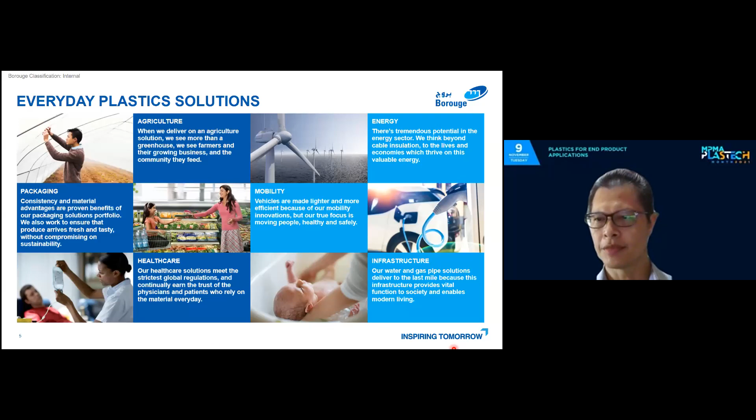For infrastructure, our business is divided into 3 subsections. Utilities, this is focusing on pressure, water, and gas. Construction, focusing on plumbing, indoor applications, and also soil and wastewater discharge, and water harvesting facilities, as well as geomembrane for landfill and mining applications.

For industrial, typically it's more of a large diameter relating to a refinery or oil and gas, with this large diameter for seawater intake and outfall. And these two are steel pipe coated with polyethylene for transportation of oil and gas medium.

BorSafe is a family of pipe material that we have. This is for pressure application. We have black as well as colored, and it ranges from medium density to high density. So today we focus on this PE100 thick wall application. This grade is designed for industrial, mining, and nuclear applications that require thick wall, large diameter pipe.

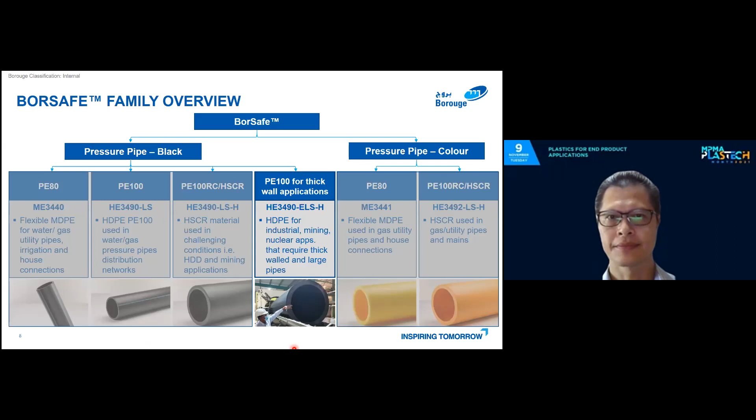What is large diameter? We are looking at more than 1200 mm or thickness SDR 7 or SDR 9. This could amount to more than 95 mm. So it could be PN 25 or more, or sorry, PN 25 and less.

This is mostly for industrial, because we are using it for water treatment and supply for mining, water transmission pipelines, and seawater intake and outfall for thermal plants and desalination plants as well as nuclear plants. Because this pipeline is launched into the sea, flexibility is required during service.

And all these projects are project-based because you don't build refineries every day. So these are determined by large project requirements, and this demand is also determined by local production capability. If it is possible to make locally, it will be much lower cost compared to shipping from another country. Maximum wall thickness of PE pipe that can be produced depends on combined factors such as machine, production capability, material property, as well as skill of the operators.

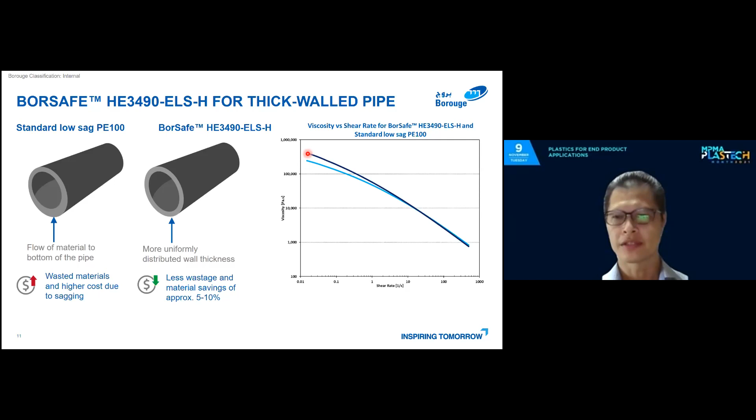So much for the introduction of this material. Look at this comparison of properties. RCP, this is the rapid crack propagation. This is a property of the pipe when subject to high impact. This pipe will crack, so this material needs to withstand the crack propagation and arrest it before it progresses to further length. It has the same performance as the standard PE100.

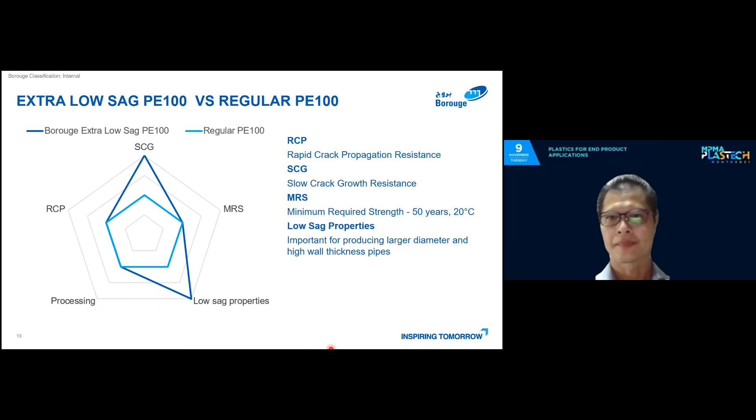Here is just a schematic of grade recommendations for the sizes that are required. If we need a 60 to 70 mm wall thickness of the pipe, our standard PE100 3490 LS would be suitable. If you have anything more than 70 to 90, then I would recommend the LSH material. Of course, if you have anything more than 95 mm, the best in class would be ELSH.

This grade is made with bimodal technology with hexene comonomer. The ease of processability, in addition to the resistance to sagging, is through this improved viscosity MFR that we have seen. There is a more than 0.15 provision given in ISO 4427. Again, I must stress that the wall thickness capability changes per local production capability. That means if your local machines are able to make this size, with the raw material used, coupled with operator skill, a good large diameter thick wall pipe can be achieved.

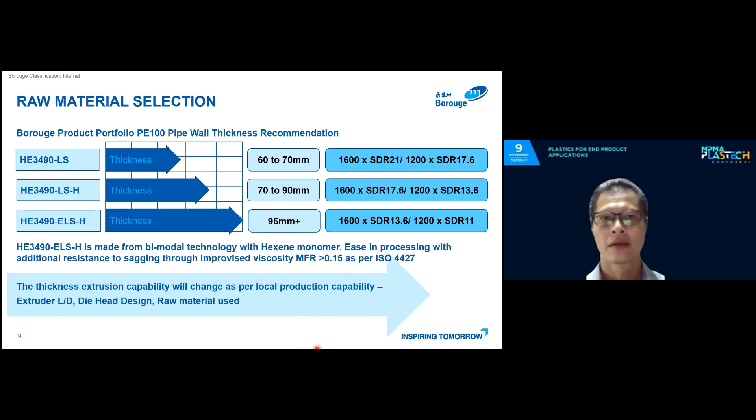Next is in Myanmar, in a copper mine. This pipe application is for acid solvent transmission. As we know, in mining you need a lot of acid to wash away the material to get whatever you want from the mine. The pipe is produced by Chinaust, size 800 mm SDR 11, so about 74 mm. What they require is corrosion resistance against acid solvent, and PE100 is good for this kind of chemical resistance.

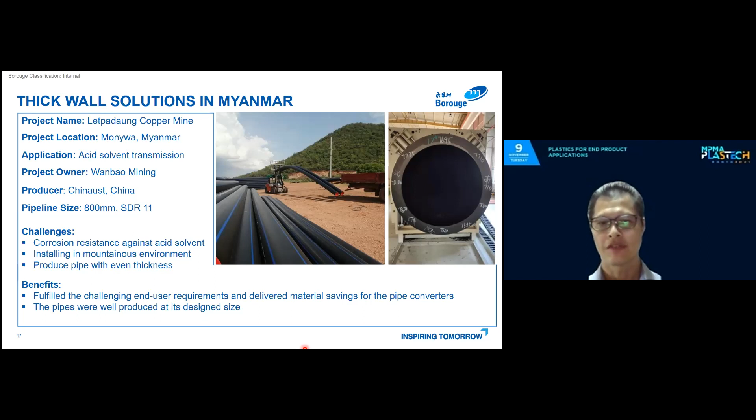The last example is in Vietnam. The producer is Thiên Phong Plastic. This is a province southeast of Ho Chi Minh City. The purpose is seawater transportation into prawn farms. The pipe sizes were 1200 to 1600 mm, SDR 11 to 17, so wall thickness ranges from about 94 to maybe 109.

What they need, of course, is a suitable PE100 material that can be made into even wall thickness, as well as resistance to seawater corrosion. And they need a large seawater volume transported through harsh conditions at the installation site, because the pipe has to go through sand dunes, under the river, and then to the prawn farm. So this ELSH, a durable pipeline with minimum maintenance cost, is able to support their prawn farm operation.

So much for all the examples as well as the material introduction. Here I conclude: development of this material and pipe extrusion technology have driven production of even larger pipes, currently up to 3.5 meters. The success of these large diameter pipes has been proven in industrial application, as you've seen above. Provided operational pressures are not too high, PE100 can be cost effective for large diameter water transmission pipe when whole life costings are taken into consideration, including pipe maintenance and leak management.

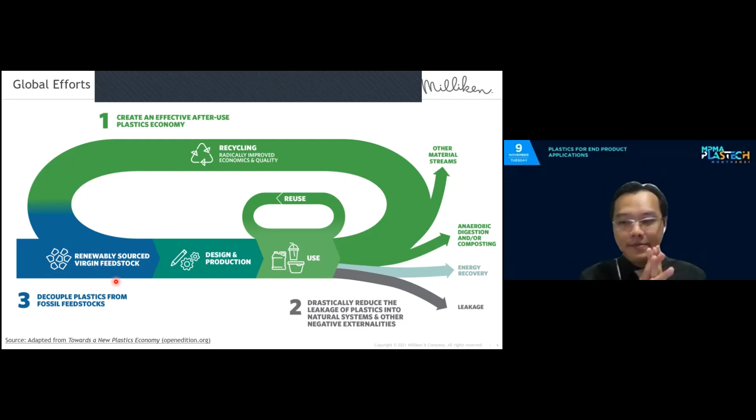How can we use renewably sourced biomaterial? These are the three main themes. But the theme of my talk today is really the often overlooked.

What about the design and especially the production stage? My talk will be about injection molding, optimizing the process to use as little energy as possible to be as sustainable as possible. Sure, all of this needs to happen, but let's not forget small parts of the big cycle where we can also make an impact to increase the sustainability benefits.

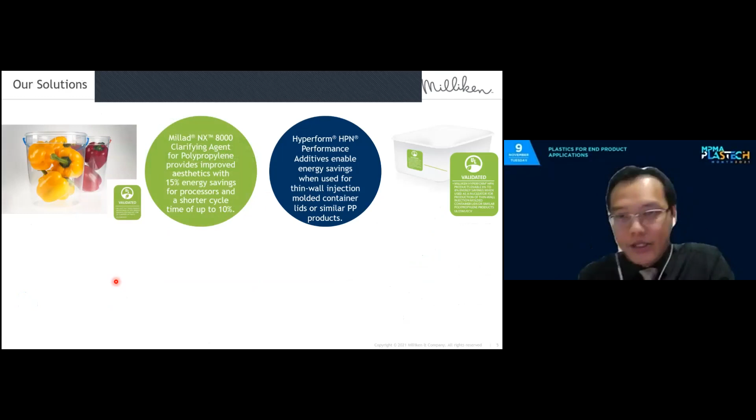So today we will be talking about three additive solutions from Milliken. Very quickly, our clarifying agent, Millad NX8000, our high-performance nucleating agent, HPN, and also the very new Delta Max impact modifiers. Let's look into them one by one.

NX8000 is right now the most popular, most advanced clarifying agent for polypropylene, with a lot of aesthetic improvement. But today we are really talking about how it can enable the optimization for injection molders to save energy and reduce cycle time. So I have a 3-minute video, please enjoy.

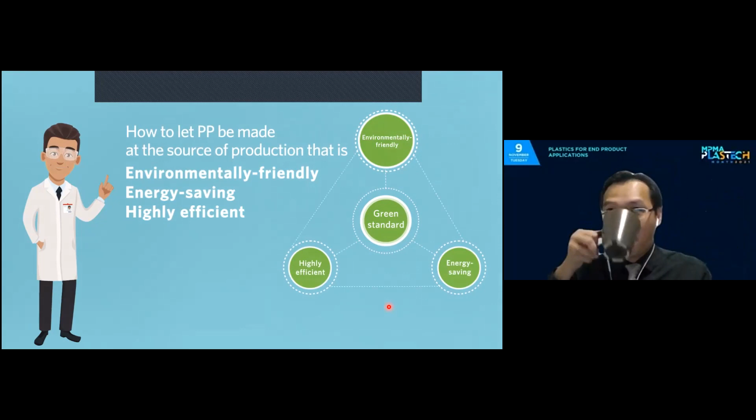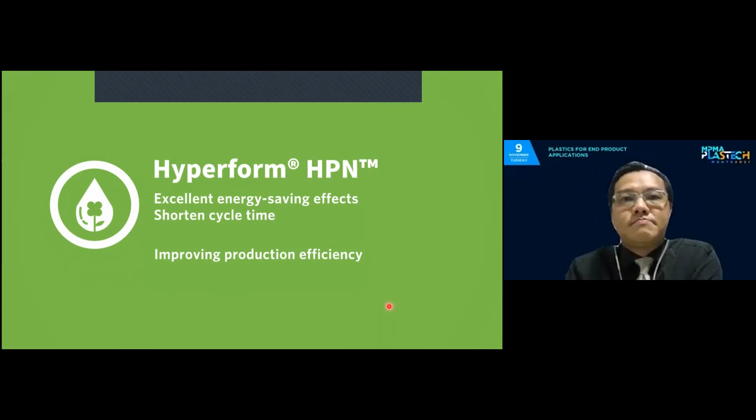Do you know how to let PP be made at the source of production in a way that is environmentally friendly, energy saving, and highly efficient? Compared with traditional polypropylene clarifying agents, having Millad NX8000 clarifying agent in the injection molding process can effectively shorten the molding cycle, reduce injection temperature and energy consumption by up to 15%. High-performance HPN not only has excellent energy-saving effects but can even shorten the cycle time, improving production efficiency. Thanks to efficient and energy-saving injection molding processing technology, Milliken products have been independently certified by UL and conferred the UL Environmental Declaration Verification. Being one of the most trusted third-party product safety and standard development institutions in the world, the market fully trusts UL-issued sustainability declaration verification. If we produce 1,000 tons of Millad NX8000 PP injection molding products to replace ordinary plastic products, it is equivalent to saving 3,672 hours of production time, which is approximately $150,000 worth of expenses, a reduction of 4.1 cars' annual fuel consumption, decreasing carbon dioxide emission by 11.8%, which protects 18,210 square meters of forest area, equivalent to 2.5 times the size of a standard football field. Similarly, if you use high-performance HPN to produce thin-walled products, you can reduce energy consumption by around 5 to 8% on average. When a single material is used for takeout packaging, it will be more convenient for unified recycling and reusing. If you need more information about UL, please contact a Milliken representative near you. Come and join us, and together we will protect the world and the environment. chemical.milliken.com

I hope the video was clear enough, but let me quickly go through the technical fundamentals on how NX8000, the clarifier for polypropylene, enables this productivity increase.

Traditional clarifiers, before NX8000 was introduced to the market maybe 10 to 12 years ago, had a dependency of haze, which is the optical performance, the transparency, versus the processing temperature or injection melt temperature. Traditional clarifiers have the drawback that they need high temperature to work properly and deliver optical performance. If you try to reduce the processing temperature or the heating to your extruder, the parts will turn less and less transparent, and it does not meet requirements, because the requirement of a clarified random copolymer is optical performance.

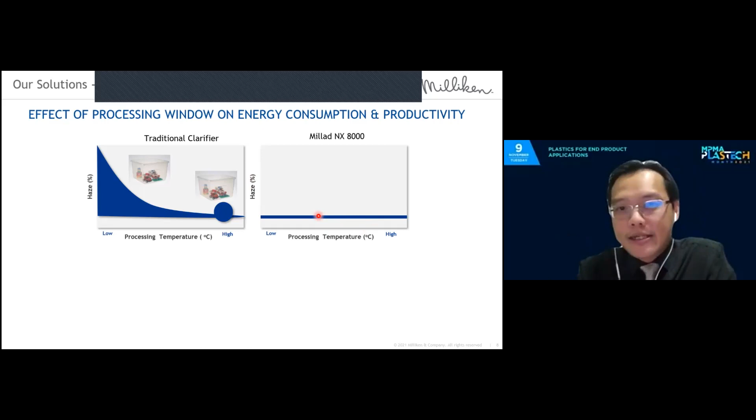But since we introduced Millad NX8000, it is insensitive. The haze, the optical performance, is not sensitive to processing temperature. Therefore, whether you process it at a high temperature or a low temperature, it works fully, it functions properly, there is no degradation or negative performance.

So we can translate that. Traditionally, the industry used to have to process clarified random copolymer injection molding at high temperatures. And naturally, if you are molding with high melt temperature, you would also need high cycle time. The hotter your melt, the more time you need to cool down in your mold before you can eject properly.

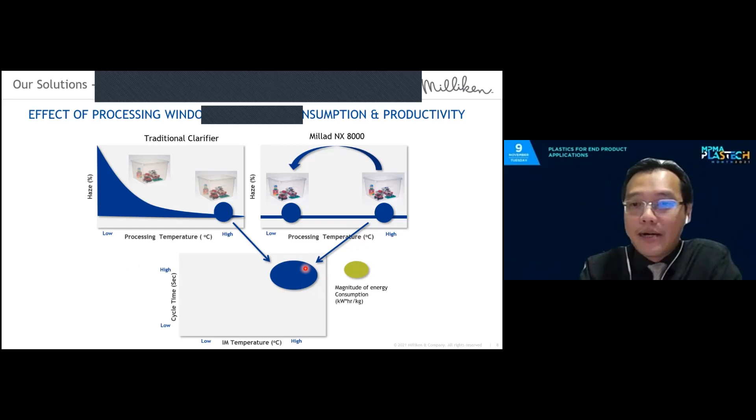We try to symbolize the size of the circle, the size of the bubble, as a magnitude of energy consumption used. By reducing the temperature, because now we don't have the bottleneck of needing high temperatures for the clarifying agent to work properly, most of the time we can also reduce the cycle time, because you are injecting a cooler melt and now need less cooling in the mold before you can eject properly. Therefore, you can reduce both the energy needed for heating your extruder, as well as improve productivity - lower cycle time, up to 10 to 15% productivity increase, meaning the energy needed to produce 1 kg, 1 part, or 1 ton normalized will be even smaller. So productivity increase, faster outputs, more parts per machine, but also energy savings per part.

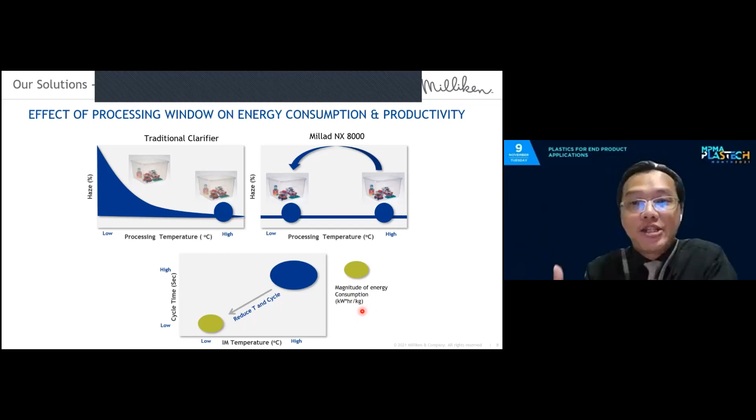Not just the overall haze or transparency benefit you get from Millad NX8000, you also get less defects and no voids. Because if you try to use the traditional clarifier random copolymer PP, especially if you try to reduce the injection temperature, it gets hazier, less transparent, and there's usually a higher risk and probability of defects such as white streaks and white specks.

And especially voids in certain parts of the plastic. Voids aren't air bubbles trapped, but they look like that. Especially now, in a very close-to-home application of syringes in this COVID world, vaccination, voids in a syringe body are a big no-no. You need to let the nurses and doctors have full confidence that they're injecting properly. You do not want them to mix up defects in the syringe barrel with actual air bubbles trapped in the medicine they're injecting.

So really, not just energy savings, but a trouble-free, robust processing window with less defects when using NX8000.

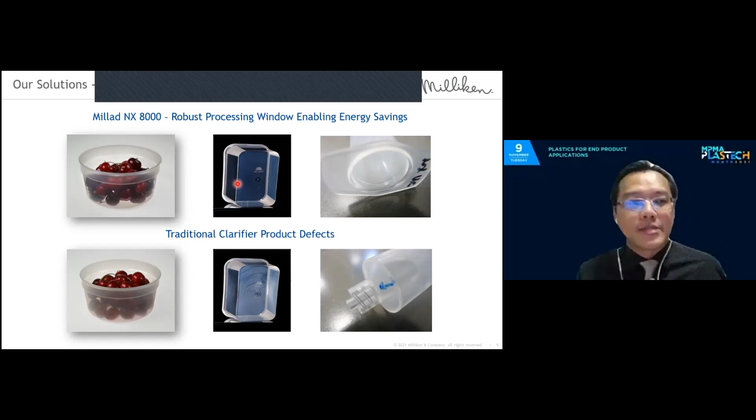On average, as verified and accredited by Underwriters Laboratory through ECV environmental validation, we are seeing a 10% energy savings reduction based on the concepts in the previous slide. And of course, you can equate that to roughly 10% reduced CO2, because if you use less electricity, power plants need to generate less.

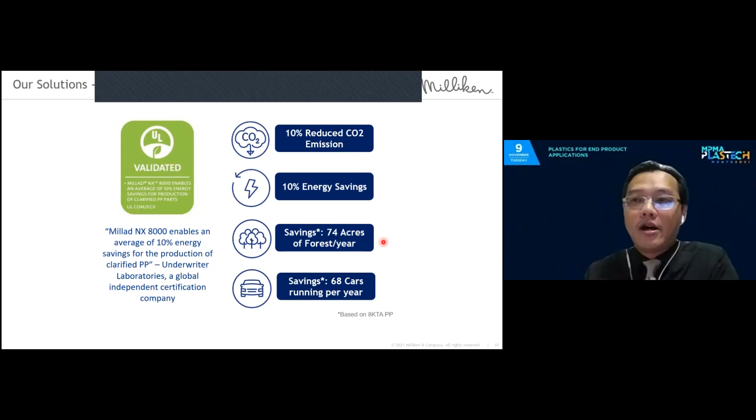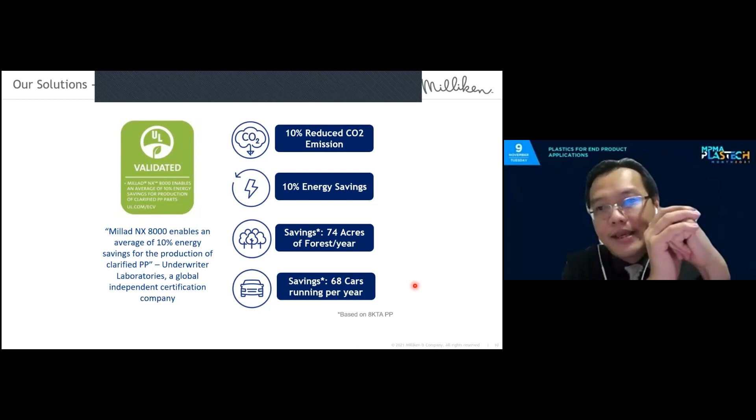If we convert that CO2 equivalent, for example using 8,000 tons of polypropylene produced per year, the 10% CO2 reduction is equivalent to 74 acres of carbon capture by forests, or about 68 cars per year worth of carbon dioxide emissions. So even by optimizing, if each injection mold can use 10% less energy while still producing the same number of parts, that's a net win for sustainability globally.

There have been a lot of trials over the past years across various different parts, as long as they contain NX8000, especially for random copolymer - things like pumps, closures, containers, or thin wall applications, across various regions and various types of machines.

On average, there's a 10% reduction in cycle time, and 7 to 25% in energy savings, electricity savings, and thus CO2 emissions. You can put a green label, validated by UL, on the parts and brochures to educate the rest of the consumers and the industry.

But don't forget, if you calculate the dollars and cents - your energy costs, overhead, labor costs, depreciation - put it all in, a 10% reduction in cycle time with the productivity it brings can sometimes bring up to an average of $100 per metric ton processed in dollar savings.

And this is pure processing optimization - it's not about getting a cheaper material. With NX8000 clarified RCP, optimizing the processing conditions alone gives you the dollar savings as well.

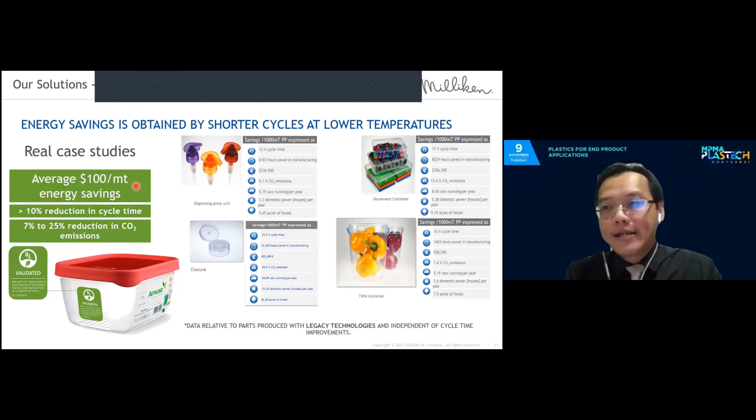This time it's mainly about the core effect of the nucleating agent - HPN, Hyperform nucleating agent. What this means is that when injected into the mold, it enables more efficient nucleation and crystallization of the PP, so it solidifies and sets quicker and faster in the mold compared to polypropylene without HPN. All the data suggests on average 5 to 8% savings.

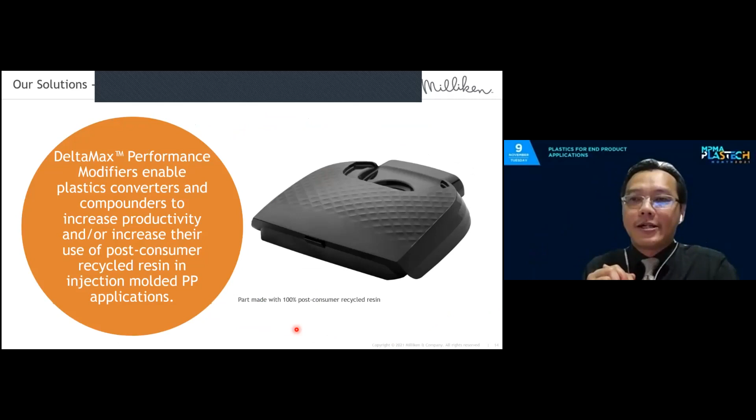Moving on. So Deltamax is a very new to the world technology, which part of it also helps in terms of optimizing the processing condition of an injection molding process. But to take a step back, we are focusing here on impact copolymer polypropylene or block polymer polypropylene, right?

For injection molding, it is always a case where the higher the MFR, the easier is your injection molding, wider window, especially if your parts are large or your flow paths are very long. But there is always that balance or the tension, right? If you have very high flow ICPs, most of the time you cannot have higher impact ICPs. And if you need high impact performance, you are usually limited to the melt flow that you can have.

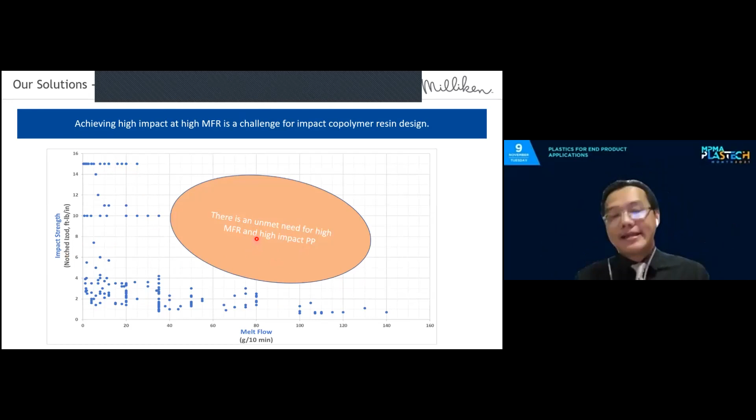And this is where Deltamax comes into play to target the space where can we have both high MFR and higher impact strength. To be honest, even right now, you can meet this with the solutions which are already available, for example, impact modifiers. But Deltamax is not just another impact modifier. It will manage your melt flow and impact strength at the same time without significant reduction of stiffness, which is the usual negative effect of putting too much impact modifier.

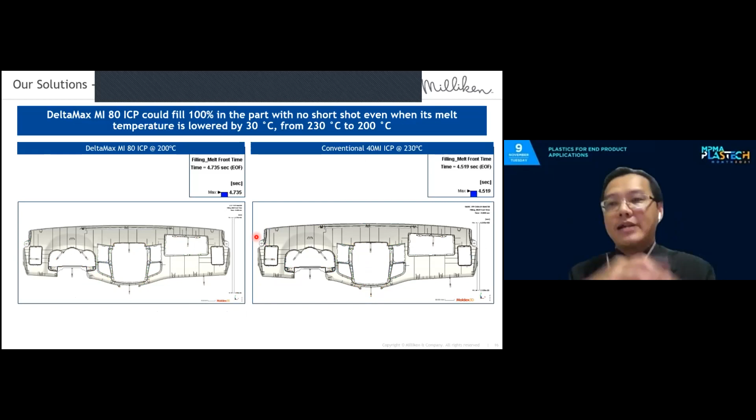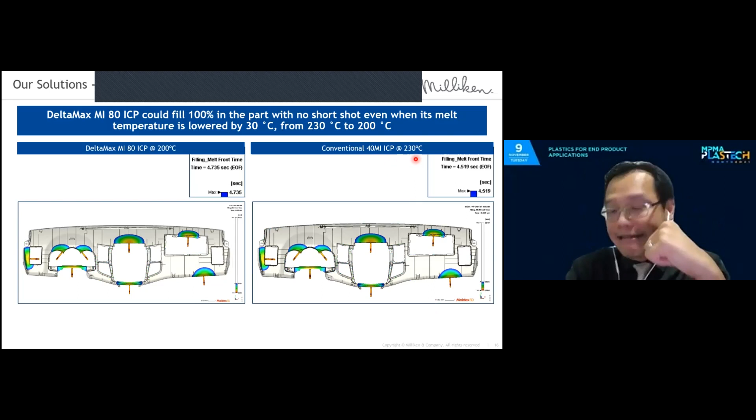And so this is a trial case, right? We work with a customer and we developed this Deltamax 80 MFR impact polymer, which has similar impact performance compared to a conventional 40 MFR ICPs. And we work with Moldex3D and we did some simulation. Of course, there's actual real mold trials, but this was a nice picture of the simulation where a 40 MFR control had to be injected at 230 degrees for this specific part that we chose. Of course, it's an instrument panel of automotive.

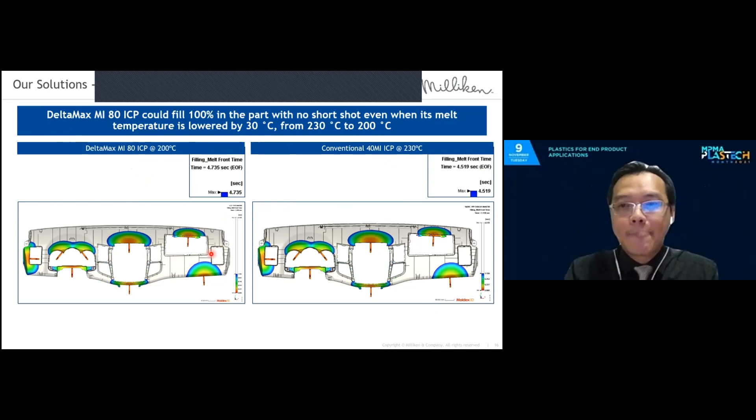But because of the higher MFR, at again, similar acceptable impact performance, we were able to reduce the injection temperature down to 200 degrees. And you can see there's no problem with filling, similar filling times. So if you have higher MFR, you have the opportunity to reduce the injection temperature. And therefore, all that we have talked about in the last few minutes is also relevant, right? Reduce the cooling time and therefore increase productivity. Therefore, this is a true example of crates.

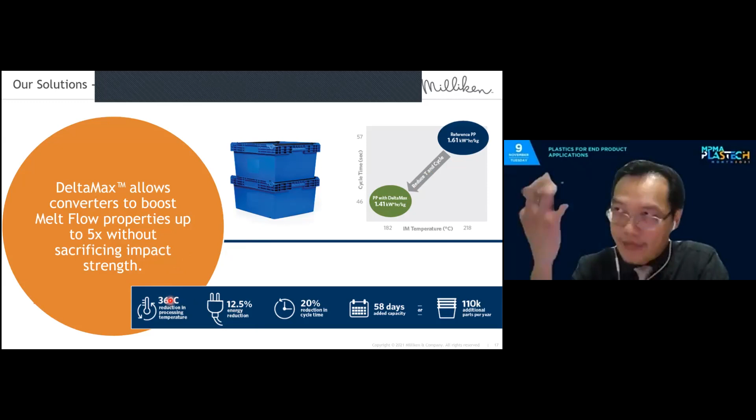And this particular example reduced injection molding temperature from 218 to 182 degrees Celsius. And because of the cooler melt, you can reduce your cooling time and therefore your cycle time from 57 to 46 seconds. And you enjoy again the energy savings, right? The kilowatt hour. So 36 degrees temperature, 12.5% energy reduction, 20% reduction in cycle time. And for them, they had 58 days of added capacity or 110,000 additional parts that they can produce, right? Because increases...

Hi, I think Mr. Samuel has his computer hanged. Dr. Fahmi? Yes, assuming so. Yeah, I think his computer hanged. So yes, maybe we can proceed to the next presenter because I think it's just one or two slides left. Yeah, he has three more slides to go. Okay, we'll move on to the next one. All right, thank you.

Anyway, thank you, Mr. Samuel. I think this one I can share with my students, okay? Because most of the time we only focus on the processing parameters or machine setup in order to reduce the cycle time, not the additive.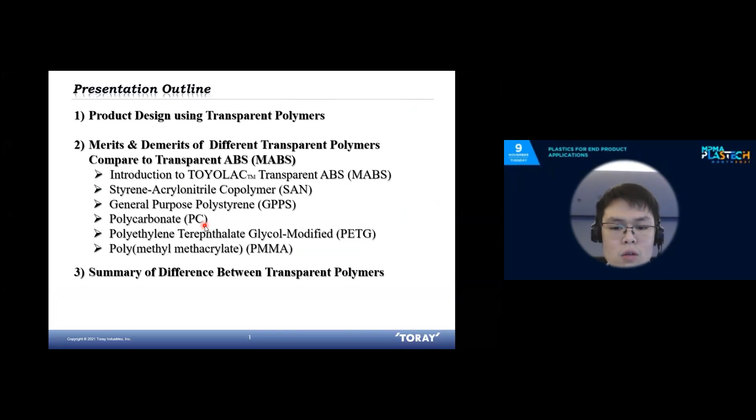So before we start, let me introduce our company. So I come from Toray Plastic Malaysia. We are located at Penang. And then our main business is on manufacturing of ABS resin. So transparent ABS is one of the grades produced by our company. And then mainly we are focusing on the polymerization and also on the compounding process.

So we are the first company to start on the manufacturing of the transparent ABS, and we have already accumulated more than 40 years on this compound polymerization technology.

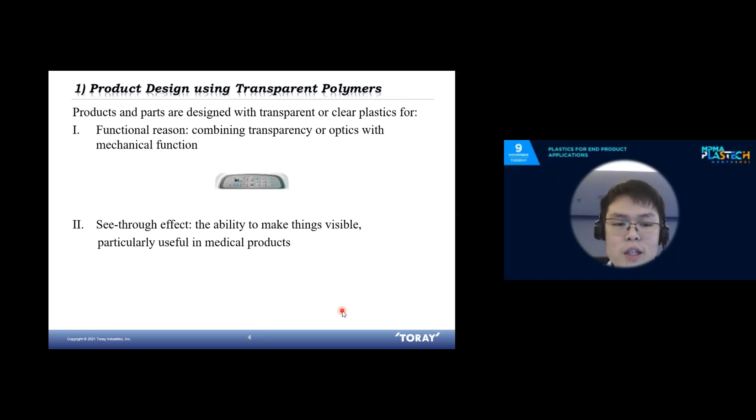So for the introduction, people are chasing a better lifestyle. So functional purpose has not become the sole aspect to be considered during product design. Visual appearance also becomes part of the details required during the design stage. As you can see, one of the examples shown here is the washing machine panel. So transparent polymer has already become one of the choices to be applied, as shown in this photo here.

So for the visual appearance, this is to show people that this value or even this kind of button can also be considered to use ABS, MABS. Next, for the see-through effect, for transparency, transparent polymer can also be considered for medical products such as the syringe and the container for medicine. Besides that, it can also be considered for beakers for laboratory application.

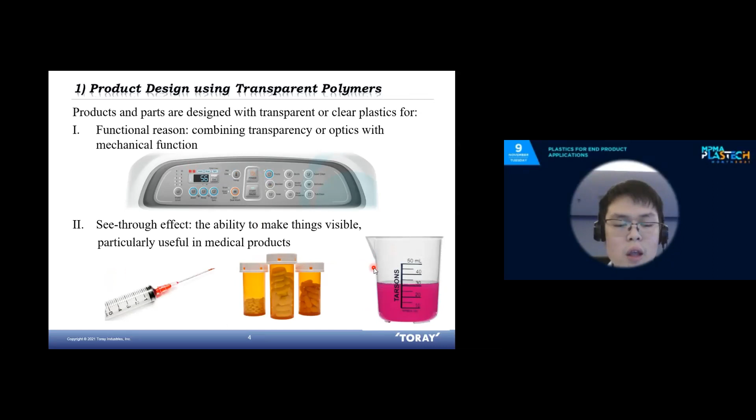Next, with good mechanical properties, the transparency of transparent plastic can also give an aesthetic effect to attract the consumer. For example, here, the monitor of our PC. With the changes of design from time to time, we can see that previously all the parts were made of opaque materials. There are some changes to the design, mainly to attract people with the aesthetic effect, as you can see from here.

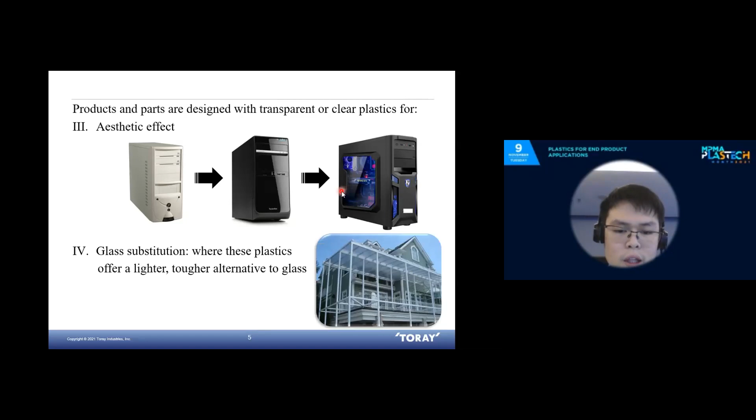And lastly, transparent polymer can offer a lighter or tougher alternative to glass. So this is our introduction. Mainly today we will compare a few common transparent polymers, which are SAN, GPPS, PC, PETG, and also PMMA. Before we start, I will introduce what transparent ABS is.

So transparent ABS is actually the polymerization of four monomers: methyl methacrylate, acrylonitrile, butadiene, and styrene. Each of these monomers represents its own function. For example, acrylonitrile is more for chemical resistance, and styrene is more for product rigidity, as needed for certain applications.

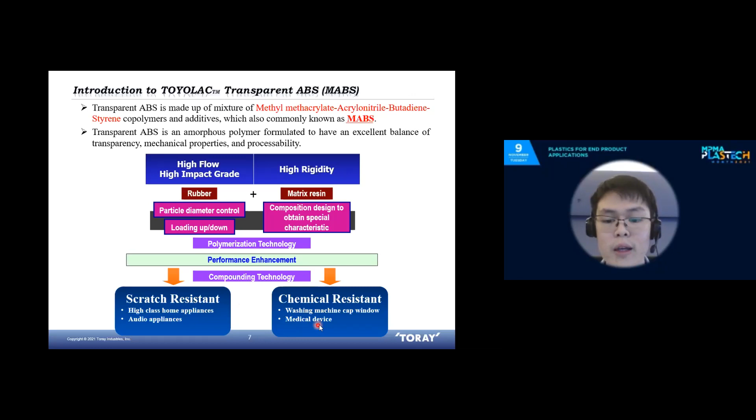So through polymerization, by controlling the rubber size or the matrix composition, we can control our finished goods properties, such as high flow, high impact grade, or high rigidity grade. Through good compounding technology, our material can be enhanced to special grades such as scratch resistant, for applications like high class home appliances or audio appliances. Furthermore, through some additives, our material can be enhanced to a chemical resistant grade, which helps it qualify for some medical device applications.

So how is MABS transparent? Generally, we know ABS resin is an opaque material, meaning light is unable to transmit through the object. In ABS, we graft the PBD rubber, which is the butadiene, to the acrylonitrile styrene matrix. Due to the refractive index difference between these two materials, light is unable to pass through the object properly. Through polymerization, we introduce MMA, methyl methacrylate, into the AS resin matrix, so we are able to alter the refractive index of our MAS resin to be similar to the PBD rubber, letting the light transmit through

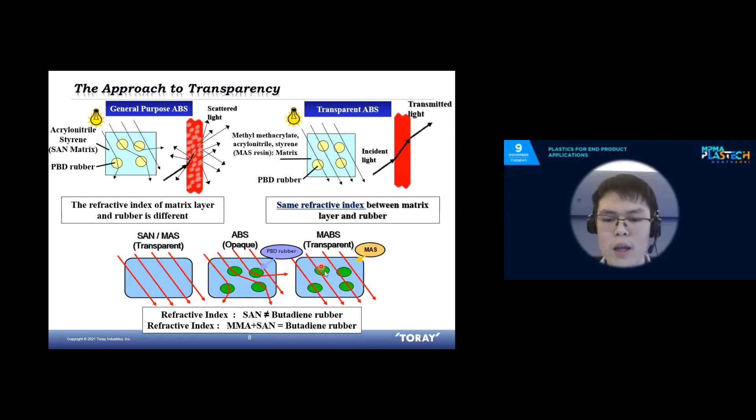our plastic. So this is the rough explanation of what I explained just now. Mainly, this is the common material where light is able to transmit through the plastic. Then due to the PBD rubber, light cannot pass through the resin. Next, by altering the AS matrix, light is able to pass through again.

So we will start with the comparison of our plastic with other common transparent plastics. We will start with SAN, the styrene acrylonitrile copolymer. This is the general explanation. SAN, styrene acrylonitrile, is the predecessor of ABS, which is a rigid and amorphous plastic.

So mainly, like I said just now, it is the polymerization between two different monomers, so we are able to control the ratio between both monomers. By altering the percentage of each monomer, we can create the required properties. For example, for acrylonitrile, if we further increase the percentage of this monomer, we are able to obtain a good chemical resistant grade.

So mainly this kind of increment of acrylonitrile is suitable for applications such as this disposable lighter, where we need to resist chemical degradation for these plastic parts. So overall, SAN has excellent dimensional stability, high rigidity and good chemical resistance.

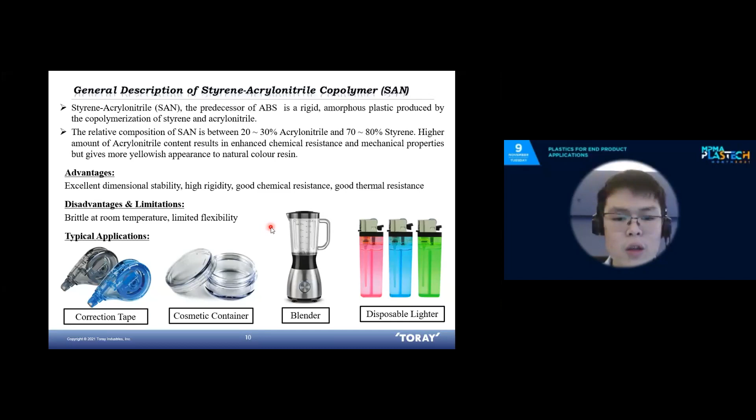So one of the disadvantages of this plastic is that it is quite brittle at room temperature. Compared to MABS, SAN lacks rubber, meaning the polybutadiene. So the parts lack flexibility, and cracks happen more easily in the application.

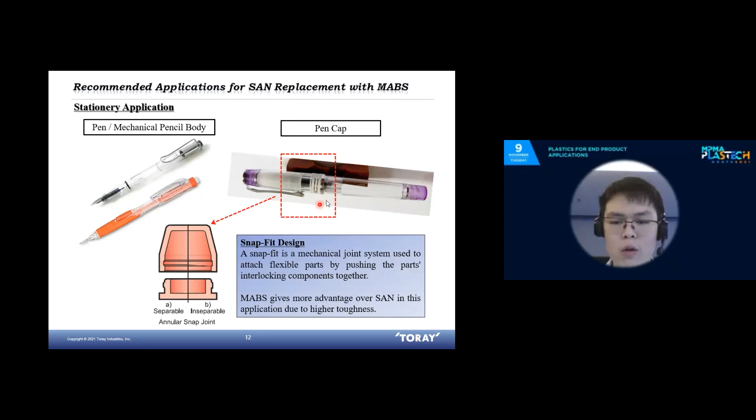So as you can see from here, we recommend changing the pen or mechanical pencil body and also the cap. As you can see from this photo, this area requires frequent opening and pushing when closing the cap. So with the assistance of the butadiene, which is the rubber, the parts will be more flexible and cracking issues will be less likely to happen.

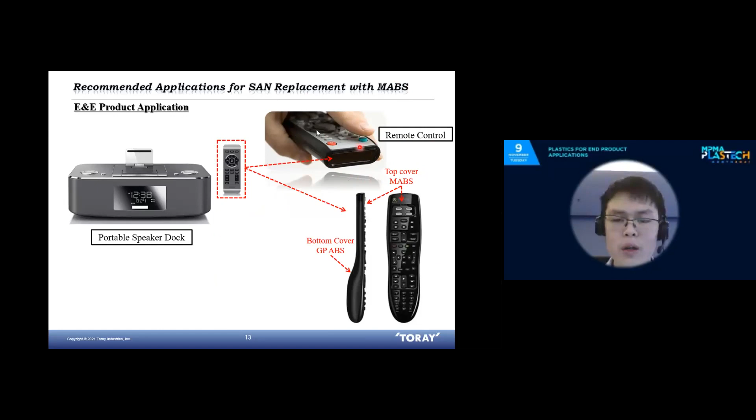Next will be E&E product applications such as the remote control. With MABS, the IR light is able to transmit through our plastic resin. The toughness enhances the material for this kind of application. During assembly, cracking is also less likely to happen. And during usage, when the remote control falls down, cracking is also less likely compared to using AS plastic.

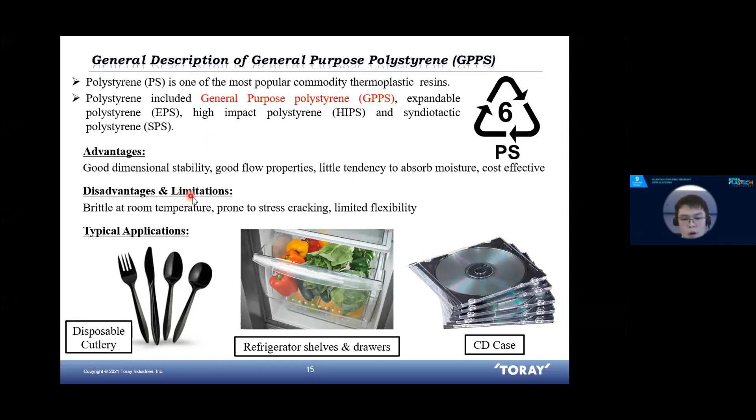The disadvantage of this plastic is mainly similar to SAN: because it lacks the butadiene or rubber, it's quite brittle at room temperature and prone to stress cracking. So we will compare again. For MABS, the impact will be slightly better compared to GPPS. And with the acrylonitrile in MABS, the chemical resistance is better compared to GPPS. Where GPPS is better is that the cost is cheaper than MABS.

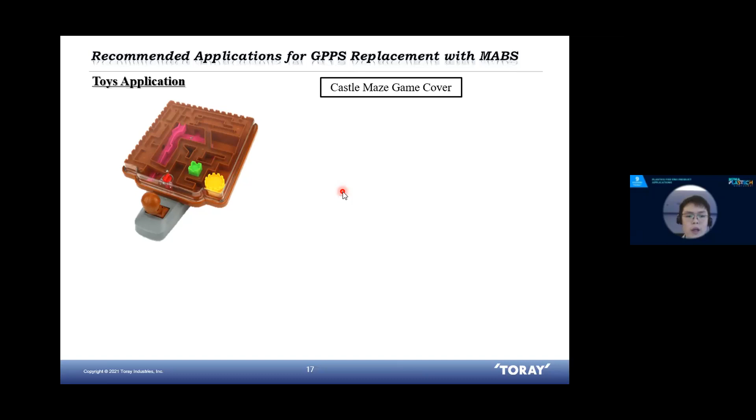The recommended application for these changes is toy applications. As you can see in this photo, there is some boss design, where screws may be needed to assemble the parts. With the flexibility of the rubber, MABS gives more advantage over GPPS in this application due to its high resistance to cracking. Other than that, MABS, being an easy-to-weld amorphous material, can better withstand mechanical force, vibration and the heat generated during the welding process.

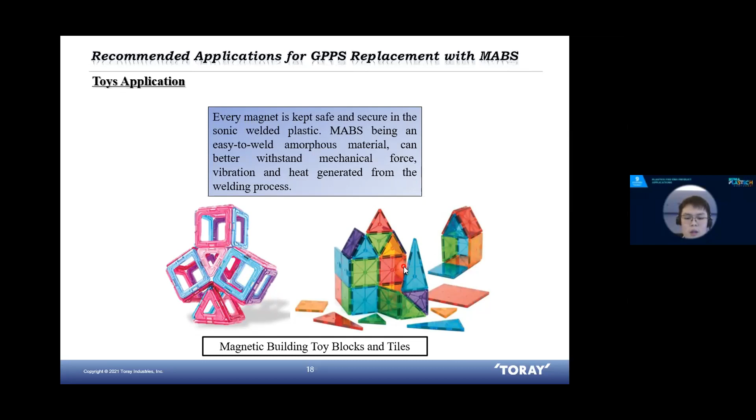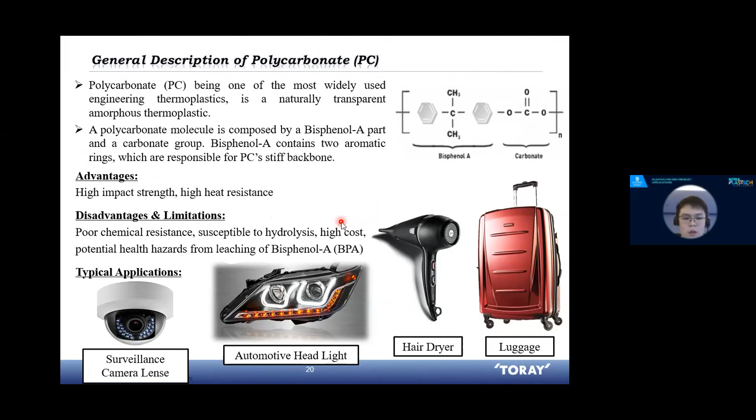So for this hydrolysis, if it happens, the impact strength of this material will be slightly dropped compared to before the hydrolysis happened. So this is one of the disadvantages when PC is applied. In terms of the property side, we can say that the impact strength and heat resistance of PC is quite good compared to MABS. Actually, we can say very excellent compared to MABS.

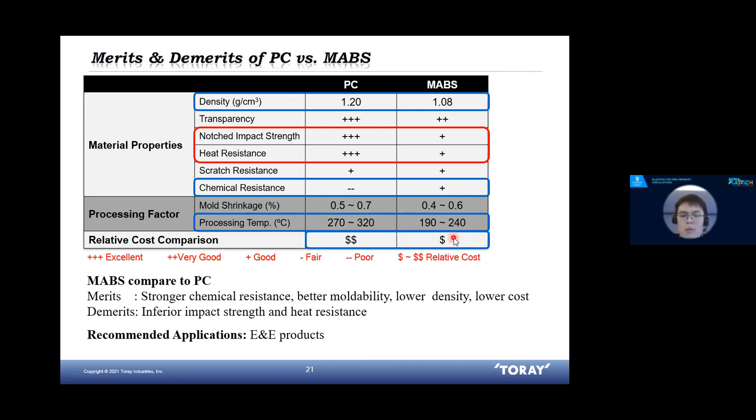However, for the MABS side, one of the highlights we found is that the density of MABS is lower than PC. So mainly this will play a role in that a part can use less material compared to PC. And then on the chemical resistance side, MABS will be better compared to PC. And in terms of processing temperature, MABS uses a lower temperature compared to PC. In other words, using a lower temperature also means energy saving compared to the PC grade.

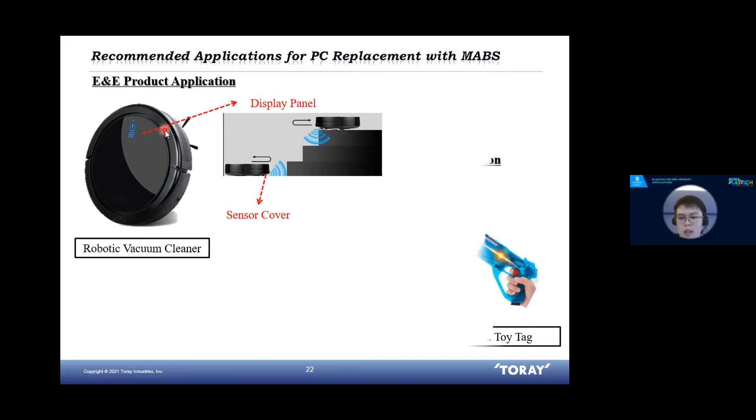So for recommended applications for this PC replacement, one of the recommendations that we tried is for E&E product applications, like the robotic vacuum cleaner, mainly for the display purpose and also for the infrared control to the remote control. And then next, some toy applications, similar to complicated molded parts and also for the light to transmit to the other parts.

So the advantage is easier molding due to the good flowability and processability of MABS. MABS is also good for secondary processing such as film coating, and it is cheaper compared to PC. So we'll move on to PETG.

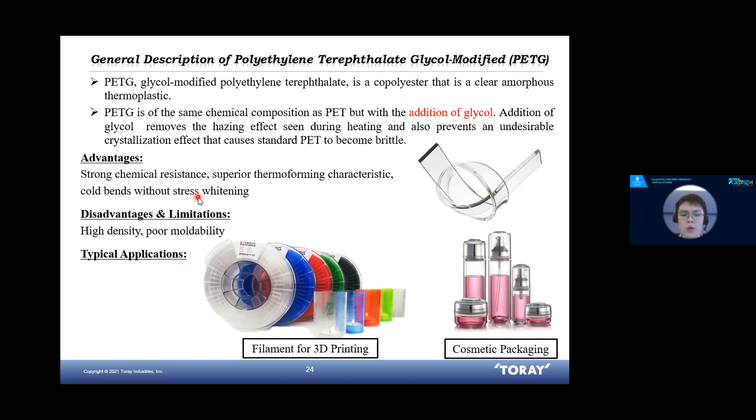PETG is commonly known as polyethylene terephthalate, PET, plus glycol. The glycol is added to remove the hazing effect seen during heating of the plastic. PET with glycol is able to stop the crystallization of PET at high temperature, which makes PET opaque and brittle. One advantage of PETG is very good chemical resistance to common materials such as soap or other cosmetic materials. The disadvantage of PETG is the high density and difficulty in the molding process.

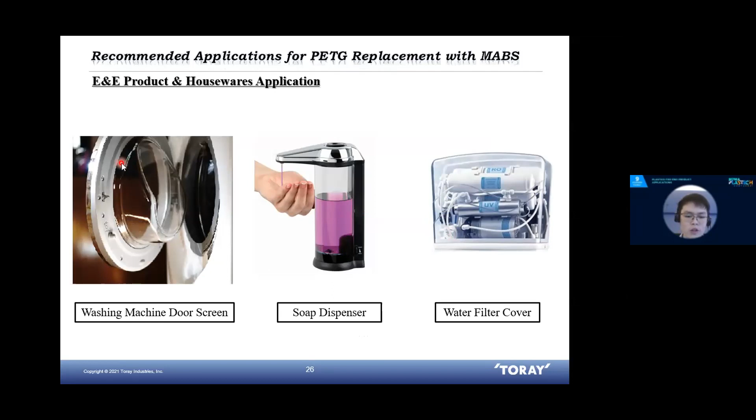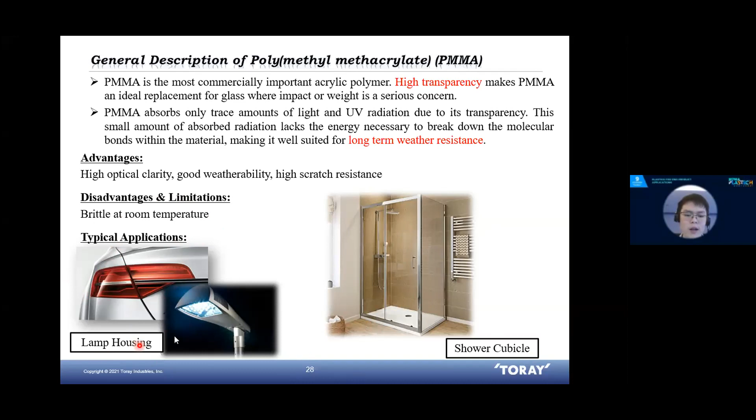So we will move on to our last application. This is PMMA. PMMA is the most commercially important acrylic polymer due to its high transparency. This plastic only absorbs a very small amount of UV radiation, so it has very good weather resistance in application. In terms of transparency, PMMA also shows very good optical clarity and very high scratch resistance. Similar to MABS, it is a bit brittle at room temperature. Some common applications for PMMA are lamp housings or shower cubicles.

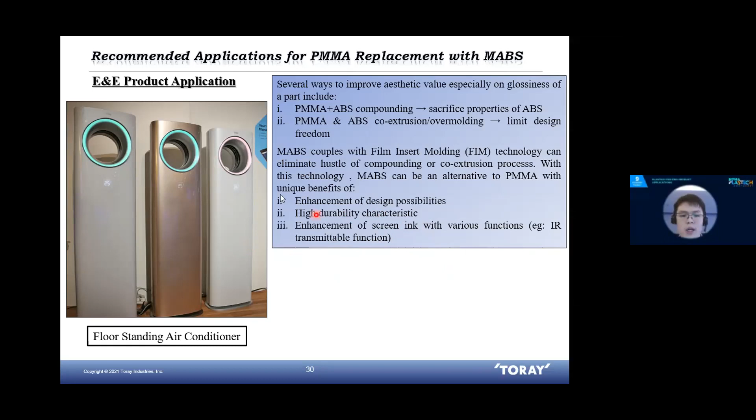One of the molding technologies currently existing in our market is film insert molding. The advantage of this molding is the flexibility to change a model during application. By using film insert molding, we only need to change the design of the front PET film, and then we can mold our MABS to the back of this PET film. So manufacturers will have more flexibility to change their design for applications such as washing machines or air conditioners.

So as the summary, this is the comparison between all the plastics that I showed just now. Mainly on the transparency side, the MABS is slightly poorer than other common plastics. But in terms of performance, it has the most balanced performance compared to other plastics.

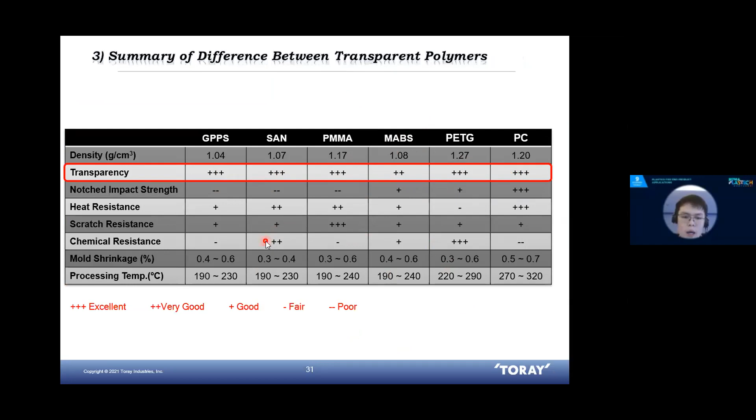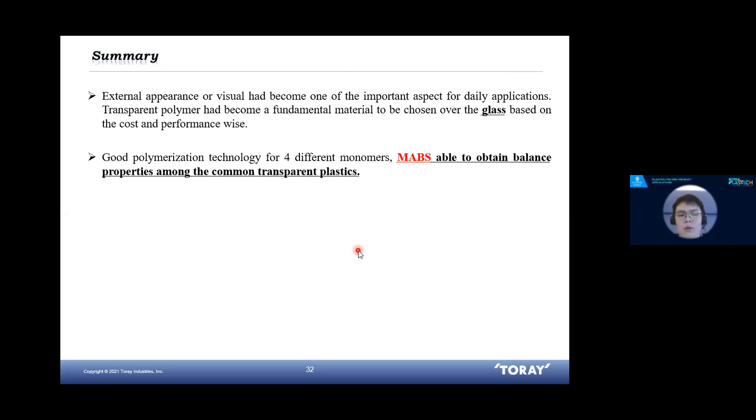So in summary, for the current market trend, external appearance has become one of the important aspects for daily application. So this transparent polymer will become a fundamental material to be chosen over glass based on cost and performance. Next, with good polymerization technology for these 4 different monomers, we can obtain balanced properties among the common transparent plastics. And lastly, on top of household application, MABS could also be a potential candidate for specific medical applications with compliance to specific regulatory standards.

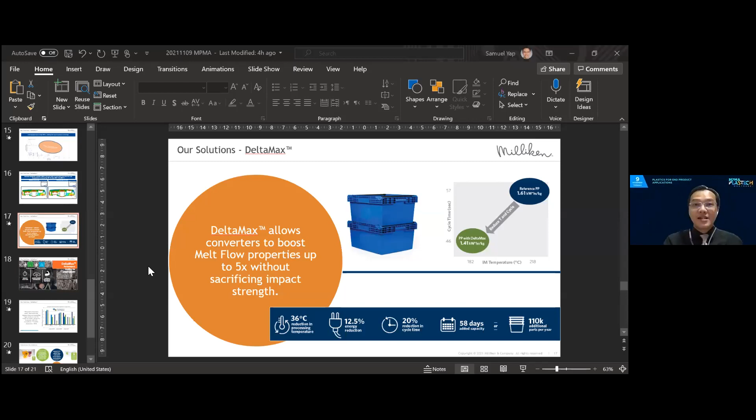All right, sharing my screen. So apologies for that. Somebody asked me to change my laptop. I will blame the thunderstorm in Singapore. All right, I think I have like 4 slides left. To pick it back up, give me 5 minutes of your time.

I was talking about Delta Max, where by increasing MFR while still maintaining impact strength, you can get some of the benefits of optimizing the injection molding conditions. For example, here, reducing temperature, reducing energy consumption, and therefore reducing the cycle time because you are reducing the melt temperature and the cooling time. And depending on your capacity, you have more days of capacity, and you can make more parts per year with your existing machinery.

And one of the areas that we see could be interesting is upgrading recycled impact copolymer polypropylene. Delta Max is not only for recycled, but recycled PP is still PP. If there is impact copolymer recycled in the stream, you can also use Delta Max to improve the recycle stream, because whether it's pre-consumer or post-consumer, recycle streams generally have more variability in MFR and impact strength. And if we can upgrade that, we can get easier processability despite this variability in the incoming stream.

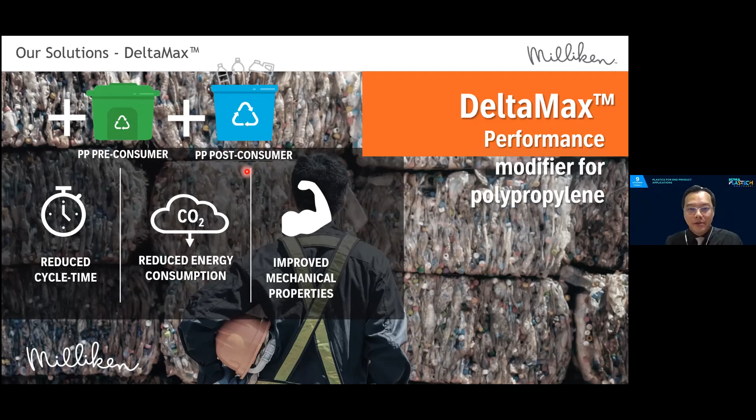And that's it. Thanks for my additional 3-4 minutes. We have shared the whole sustainability story, how we improve that in polymer processing. Let's not overlook the processing part. Today we introduced some specialty additives, clarifying agents, nucleating agents, and also performance modifiers from Delta Max, that would really help optimize for any PP users, reduce energy consumption, improve productivity, and most important of all, enhance the sustainability benefits for our shared Earth.

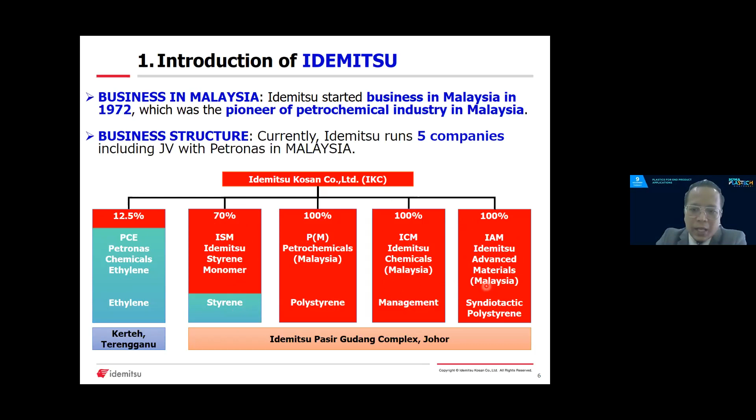Next, we would like to introduce our new project in Pasir Gudang. As you can see, our commercial operation will start from Q1 2023 onwards. We are located at Pasir Gudang, Johor. Later I will show more details about the plant location - the plant itself is about 300 square meters, with a capacity of 900 metric tons per annum.

So this is, as I said earlier, one of this product in the world. Our mechanical completion is tentatively set for September next year.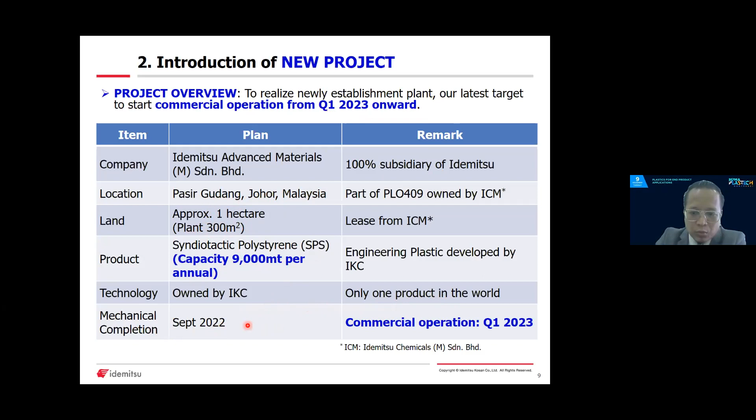Now this is the most important part where I would like to introduce our future products. Even though we already have our plant in Japan, this is the second plant, so to speak, producing it by Idemitsu to meet global market demand.

So what is SPS XAREC? This is a combination of the metallocene catalyst with styrene monomer. Styrene monomer is our main raw material, and the so-called metallocene catalyst gives flexibility to the structure of crystallized polystyrene, which is SPS.

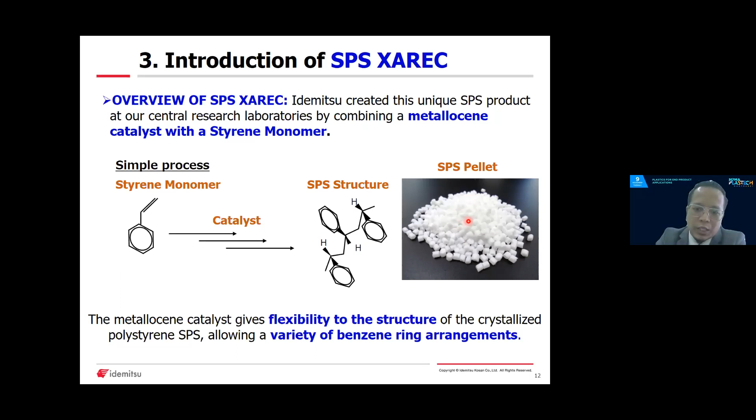Through this, it allows a variety of benzene ring arrangements. As you can see, this is our future SPS pellet, and it has already been produced in Japan since 1985.

Short introduction - I think experts know the difference between PS and SPS, whereby we have mainly 3 categories of PS. The one previously established at the existing plant in Pasir Gudang is what we call polystyrene, conventional, and this is SPS XAREC.

This will allow heat stability for about 270 degrees C, and also a good chemical resistance and good electrical property, as well as steam and boiling water resistance. So we hope to start to introduce or produce our first SPS from Malaysia starting from 2023.

So a bit more detail on the comparison related to conventional PS. Through the regular 3D crystalline structure, it can realize the engineering plastic range, whereby we have more advantage on this new engineering resin. Through the crystallization, which is one of our processes, it can gain additional characteristics, which I've explained earlier, such as better heat resistance, better chemical resistance, and also better dimensional stability. This combination of three is quite excellent, giving more added value for the SPS.

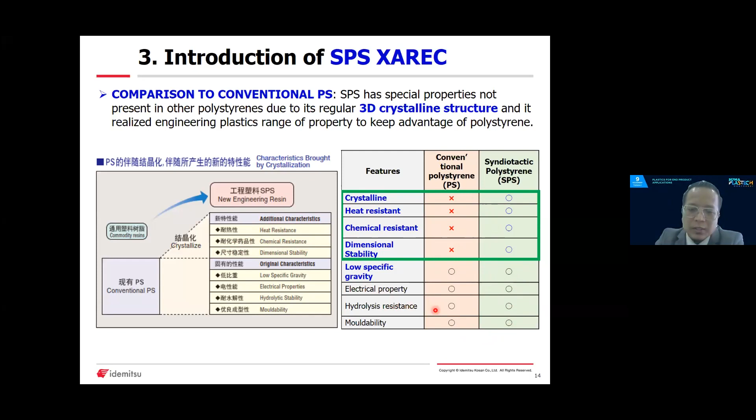I would like to share with the audience more detail on our XAREC features through our continuous R&D division lineup enhancement and high-end products. So we have a wide range of applications.

Due to the excellent properties of SPS, which contribute to a lightweight resin, it is more preferable for automotive wiring terminals, which are not deformed by soldering, as well as reduced weight savings. It also has high insulating performance, so it can make high voltage parts for automobiles.

It withstands high electricity and high voltage, as well as being the highest insulation among all plastics. Other than that, it also easily passes radio waves, which can be used for inter-vehicle radar, as well as the smartphone we have in our hand now.

In addition, due to these excellent properties, it also has high hot water resistance, which can be used for coffee servers, rice cookers, chopsticks, and so on.

This is a comparison with PA, PBT, PPS, which is the group of engineering plastics, and I believe each engineering plastic has its own advantage depending on the application the customer is going to use. As you can see in the blue colors, which is SPS, we have a big advantage compared to others, which allows us to use it for various applications as I explained earlier.

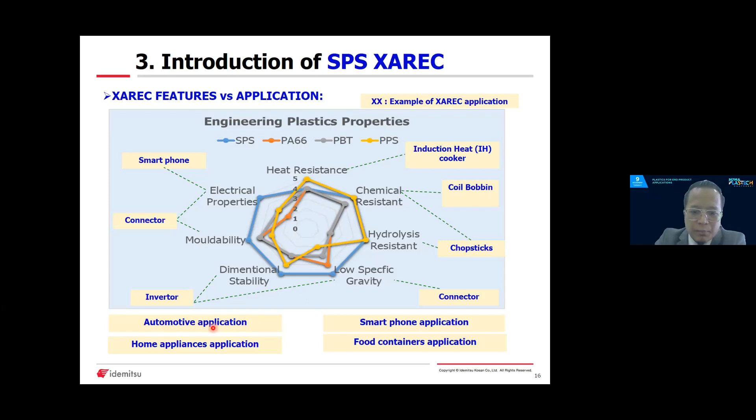This is one of the big advantages of SPS. It has a very low specific gravity, which gives the advantage of reduction of parts in weight. The second thing is heat resistance, whereby our melting point is around 270 degrees C, and moreover it does not readily absorb moisture. So this is one of the good and big advantages of SPS.

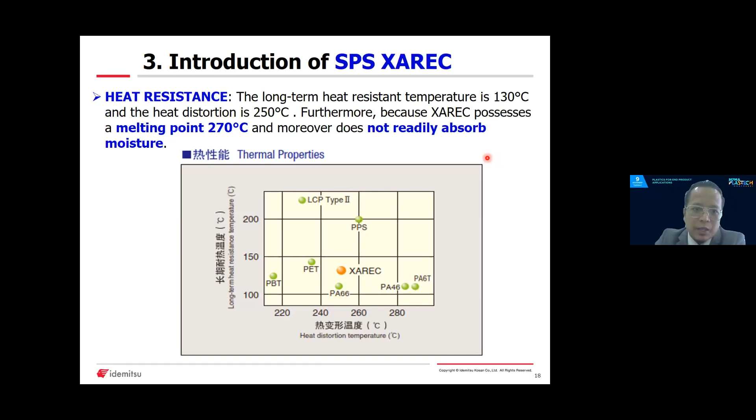A few more, but I will not explain in detail. It is also chemically resistant, with high resistance to penetration by various types of acid and alkalis, and it also has excellent durability towards oil and antifreeze. As for hydrolysis resistance, compared with polyester-based resins and PA, XAREC exhibits superior hydrolysis resistance, with properties close to PPS.

And the last is dimensional stability. Since it has a small difference in mold shrinkage between the flow direction MD and TD, it exhibits good dimensional performance. So this is easier for the audience to understand what our applications are.

Since this is heat and chemical resistant, as well as having lower specific gravity, which allows for lighter items, it can also be used for PCB connectors, which are mainly used nowadays in HEVs, so electric vehicles, for automotive applications. It has various parts being used by our customers, like inter-vehicle radar in the car, HEV motor terminal blocks, ECU housing, and so on.

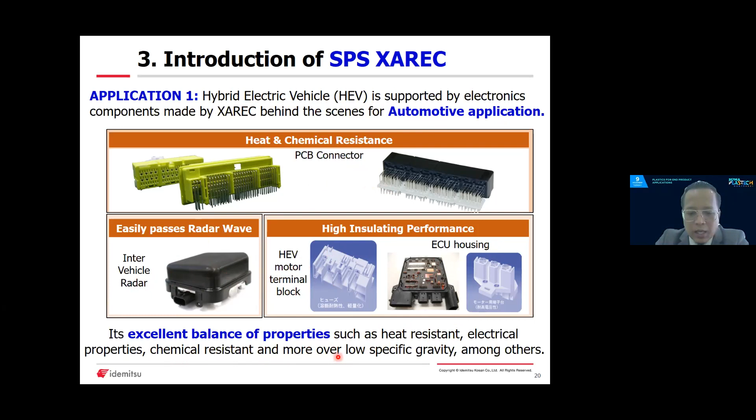This is an excellent balance of properties such as heat resistance, electrical property, chemical resistance, and more of a low specific gravity among others.

This is if you use this kind of rice cooker, and the so-called water dispenser, we have a lot of application to our customers. And also the main application for number 3, XAREC possesses excellent durability under harsh washing environments, employing acidic, alkaline and neutral detergents, which is mainly for use in food container applications.

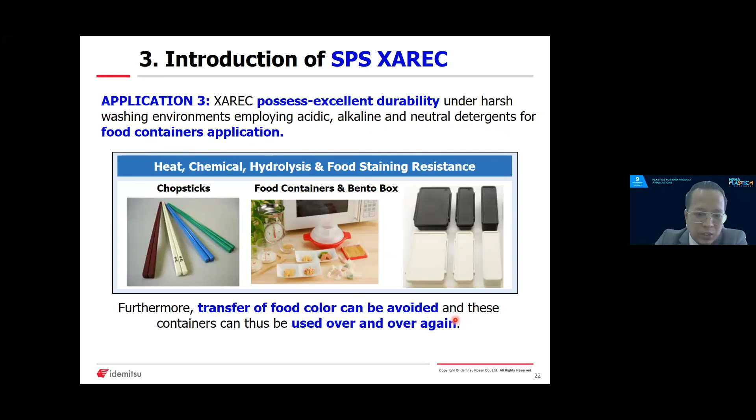So you can see it being used for many chopsticks, food containers, bento boxes, where the transfer of food color can be avoided, and this container can thus be used over and over again.

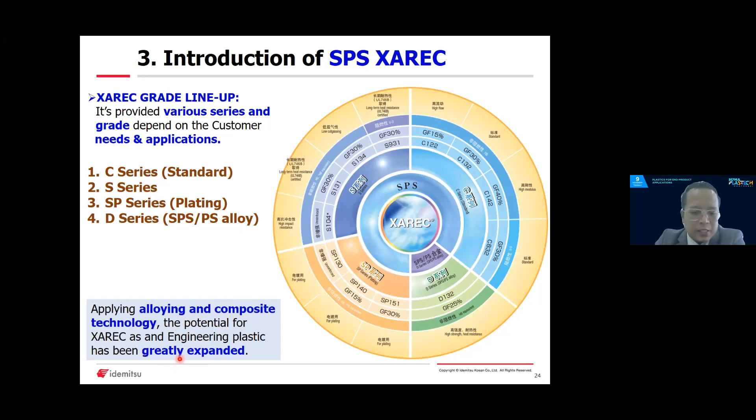Okay, last but not least, in summary, due to XAREC boasting remarkable heat and chemical resistance, as well as superior dimensional stability, it was preferred SPS in many fields, like I said earlier. And the second thing is XAREC has been endorsed by the automobile industry for use in critical electrical parts and components, which have been a collaborative effort with major end users. It is quite a well-known company, if I may say.

But last but not least, number 3, XAREC is often applied to lead-free reflow soldering to comply with current environmental requirements, whereby we are environmentally friendly products. So through this combination of these 3 so-called advantages, this could make it the first choice for many of our customers. Okay, I think that's all for my presentation. Thank you very much.

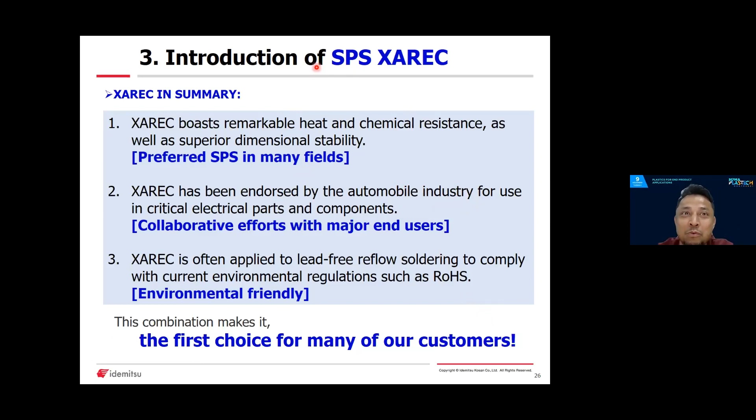This SPS topic actually reminds me of polymer chemistry that I studied at USM 20 years ago. You know, polymerization, additive, catalyst, polymer backbone. In this case, I believe it was the wonderful work of catalyst that led to the discovery of new material, I mean SPS. Okay, now we will go ahead and take some time for questions.

Quick question to Mr. Amos from Mr. Lai, and I think together with Mr. Wong. Is there any price difference between HE3490 LS and HE3490 ELSH? And is HE3490 ELSH on the PE 100 plus association list? Mr. Amos.

Hi, Mr. Amos? Yeah, I'm here. Okay, yes, there is a price difference between the LS and the ELSH. I don't have the detail, but if you need more information, I can refer you to my sales manager who is able to provide you the pricing difference. And for the PE100 plus association listing, because this material is newly launched, and per PE100 plus association, they need 2 test rounds to evaluate the material before they list it on their website. This is estimated to be by end of 2022, because we need to submit all the documentation of the test, and then they will kickstart the sampling and testing in their laboratory.

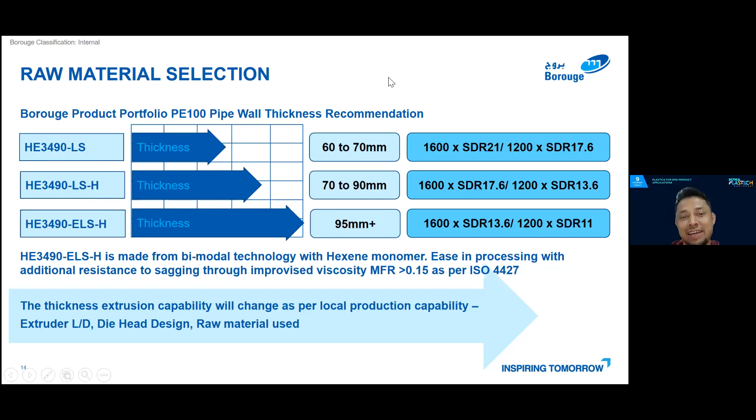Yeah. Hope I answered the question. Thank you, I think it's very clear. Okay, thank you, Mr. Amos.

This question is from Prakash to Mr. Samuel. Millad can be used only for thin wall parts and only PP materials? Yes, Millad is only used for clear polypropylene. But it is not restricted to thin wall. Any part thickness is possible, but yes, it is for clarification of polypropylene.

Okay, quick question. Another one, DeltaMax. It's also on you, right? Is it only applicable for PP or also the other polymers? Unfortunately, it is also only applicable to polypropylene.

Okay. All right. Thank you, Mr. Samuel. Thanks, sir. All right, Mr. Eric, a couple of questions for you.

The first question: one issue with MABS we face with customers is discoloration. This is due to butadiene oxidation, correct? Are there any ways to reduce or solve this problem? So for the discoloration, yes, it's mainly due to the oxidation of the butadiene. What we recommend is a higher UV resistant grade for this particular issue. Another recommendation is that you may try to use a lower AN content grade for your application.